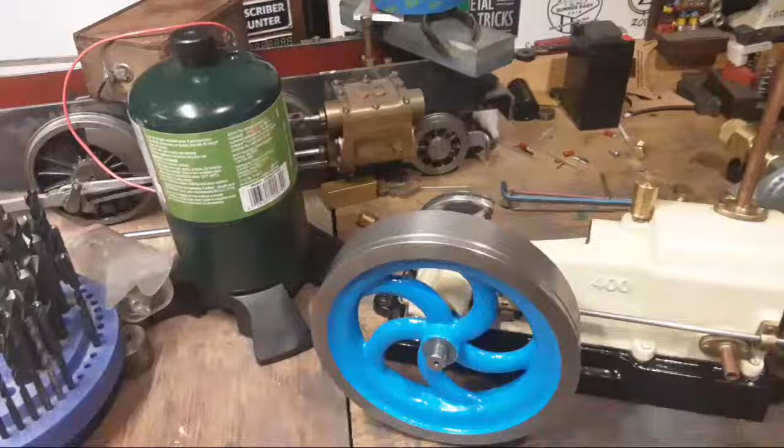Am I late? What did I miss?

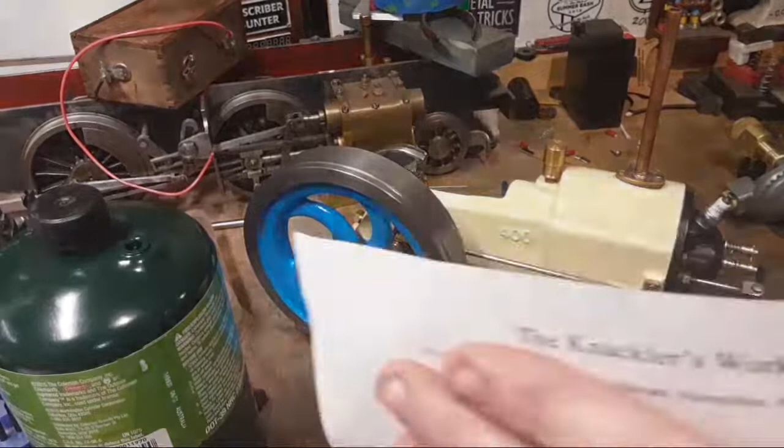So sometimes the post service can work. But I got a letter from Knackler's Workshop, if you want to see his address, but that's really nice, Paul, nice letter, and a couple of stickers. I haven't put them on the board yet, but go and check him out, there's some stickers there.

Rustnox, no, I didn't receive your stickers. Sorry, hasn't turned up. Mail's all over the show, so I'm not despairing about anything at the moment except the two taps for the head on here, and some wiring from Western Australia that needs to be here. What else? There's some pipe fittings for the muffler which I haven't seen yet either. At this point, I don't have a lot of stress about the mail system because it's crap. It's really bad. Oh, and a bit of bronze for another project, but we'll get onto that in a minute.

Project update. This is back together, right?

Hey Cam, good to see ya. Great video on your trolley the other day. Interested to see the crane when you build it. It's pretty cool, Cam. Good to see an update from you.

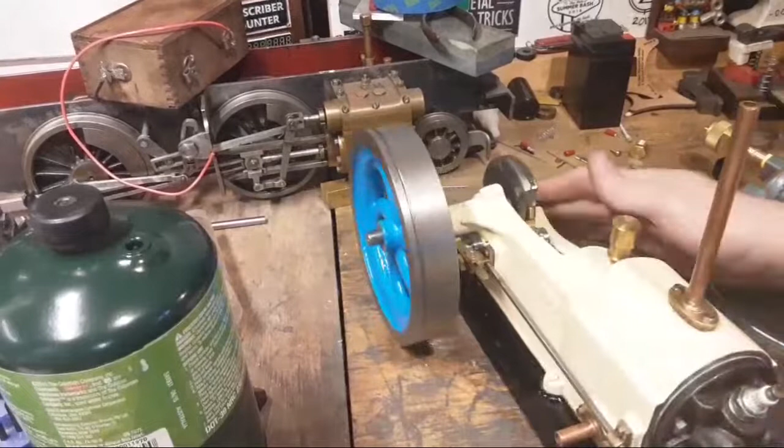But apart from that, we've got it making all the right noises, which I really like. This is all.

I don't know if it's got enough compression there or not. Certainly got some blowback there at the moment. Give it a couple of spins and it fixes it, but I don't know whether that's a good thing or not. We might have to think about fitting another set of rings if it hasn't got enough. A touch with the oil can will probably make a huge difference. But I don't know if that's enough, really.

Let's try this. Yeah, see, that's probably got enough there to run. I don't know, I really don't know. No real point of reference on that.

Wazza says it will run great. We'll see. I don't know if it's got enough compression. If you turn it over slow, it turns over pretty easy. If you give it a bit more, it's certainly got enough to pull you up. But at that speed, it hasn't got a lot.

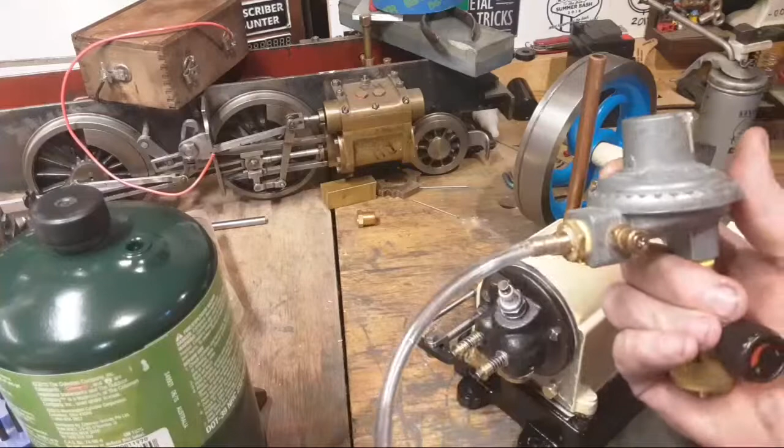Got a regulator which should work on that propane bottle over there, with a needle valve. This is 2.75 kPa, which is - do the maths - I think less than 0.4 psi. There's another tap on here to limit it, so hopefully that should provide the right sort of gas to get it running, from what I've heard. If we close this port, you can hear that valve pop as well. So that's working.

Probably more than a few thousands, I don't know.

This needs bolting down on a base of some sort so it doesn't run all over the place, because it's pretty top heavy, to be honest. If you've heard videos of it turning over, most of the noise is because this base is running - that's where the knock is. So it needs a decent base made for it.

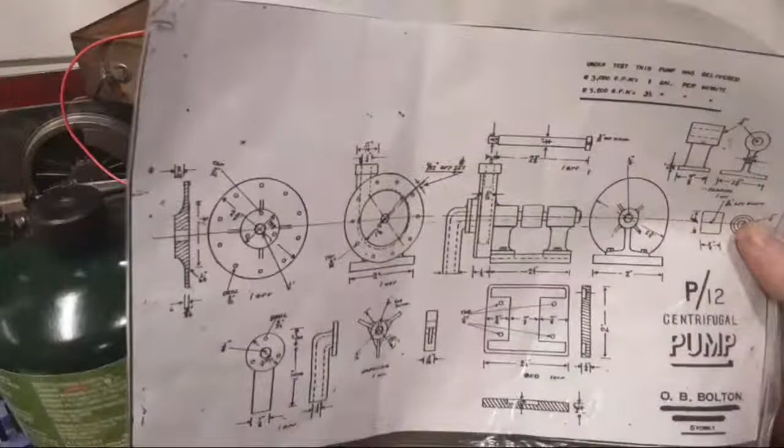I'm going to show these drawings - you can't read anything on them anyway, I can't read anything on them from here - but this is the drawing for the P12 OB Bolton pump, which is sort of the same time period.

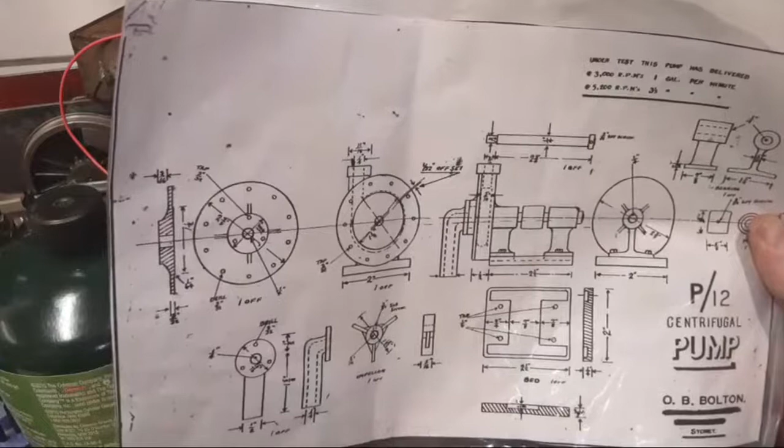And this is what we're probably going to build. It's fairly basic, almost toy-like. There's no gland here on the bearing, so they've all got to be a pretty reasonable fit. Whether I put a seal on there, I don't know - I think that might be overkill. We could probably do it without too many issues to stop the water leaking out.

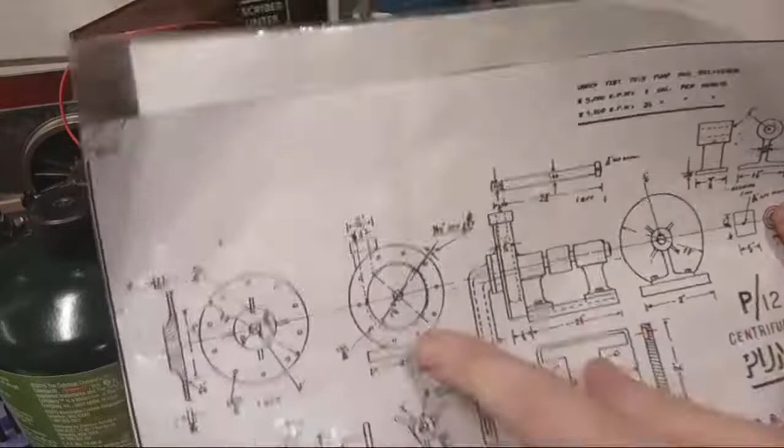It's got an offset bore in here and a 3-blade impeller that's pretty basic and doesn't really show the entire workings, because as drawn it probably wouldn't work. But it's not that difficult to get to work. It's 2 3/8 inch diameter, and this base is 2.5 by 2 inches.

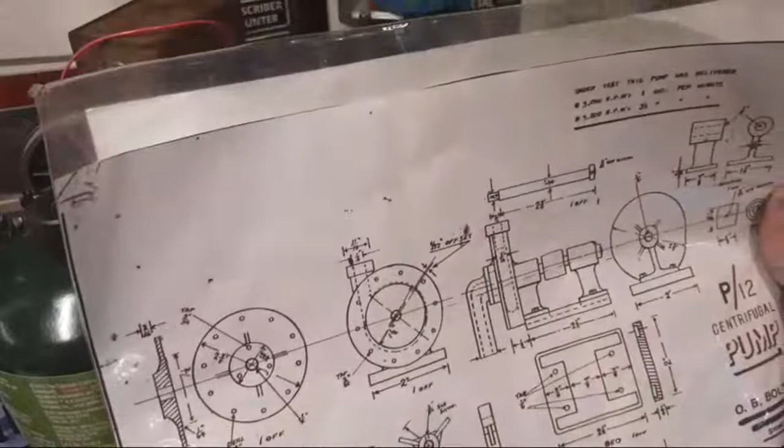I modelled this up on CAD. If my 3D printer situation's fixed by the time I get to it, I'm probably going to 3D print this and see how it looks, see if everything lines up before I start work on it. But otherwise, I'm probably just going to make one. So that's a little pump.

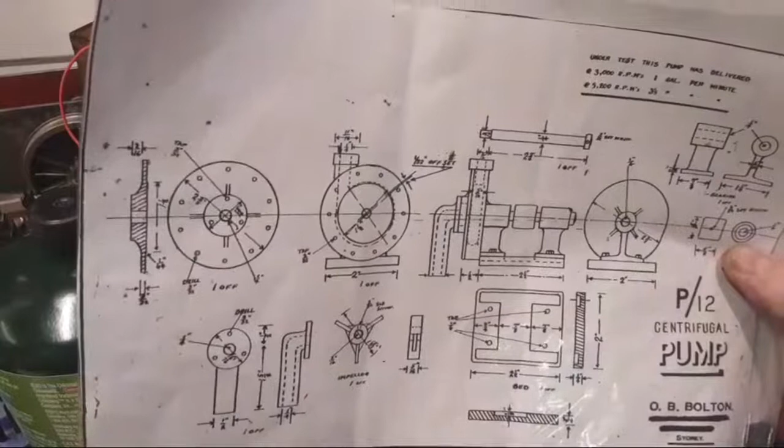The castings are available if anyone asks, and I know they all do, but they're fairly expensive because a couple of them have got some fancy cores that are a bit tricky. So probably going to fabricate this, I think.

Cork gasket on here. Someone asked the question - it's 0.8mm cork, cut to size and shape and screwed down nice and tight. This is Teflon or PTFE. I really like this because I can take it off and put it on as many times as I like, and it still seals just really easy. So I really like that. Hopefully it's heat resistant enough for this engine, but I don't believe it's going to get that hot. If it melts, we're probably doing something wrong. So there we go.

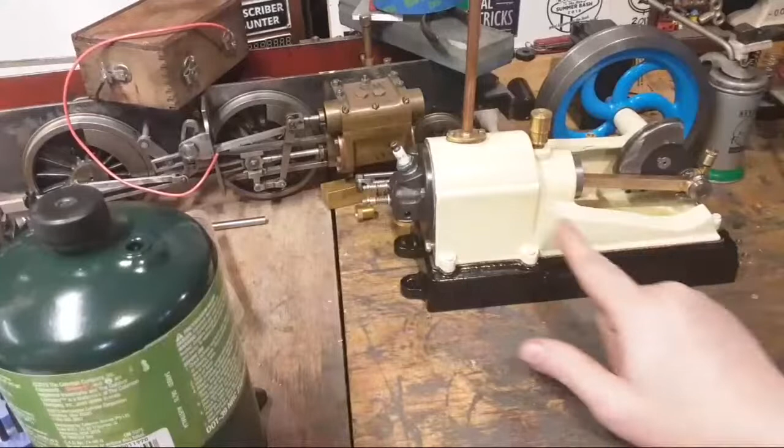By the weekend I might be ready to have another play with it, but at this point I'm thinking it needs... I'm black now because of it - it's always the way, I have to find a rag for that. I'm thinking it needs a blue stripe on here, probably just one on here it'll get, and probably a square around the top and a stripe this way, something like that.

It would be fairly basic and probably only on the front. Whether it has one down there or whether I put one around the top there, I don't know. I think that's a bit overdone. I think we're just going to run a stripe across there - probably a stripe around the top and probably a blue stripe here. We'll see.

Really impractical paint colour, just so you know, but too late now.

Picked this up this week. Been looking for a while for a small scribing block. This is obviously shop made. It's pretty clever design actually, really quite smart. It's adjustable.

The only problem with it, might need some mods, is that it's only adjustable when this is loose. So we're looking into that. It's quite a well-made thing.

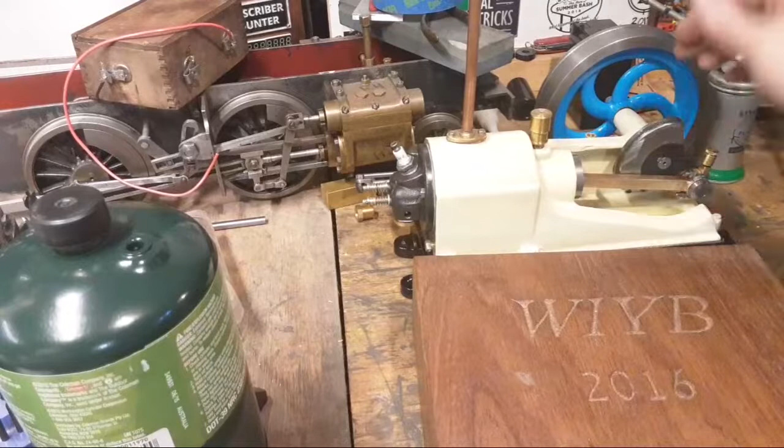I put in a pretty scary video because you've got to be in things to win them, and I actually won. So it was pretty amazing, actually. Still got a certificate up on the wall that says I'm voted worthy, which is from Keith Fenner, which is really, really nice. But someone made these, and I was lucky enough to get it.

Until now, I haven't been able to use it.

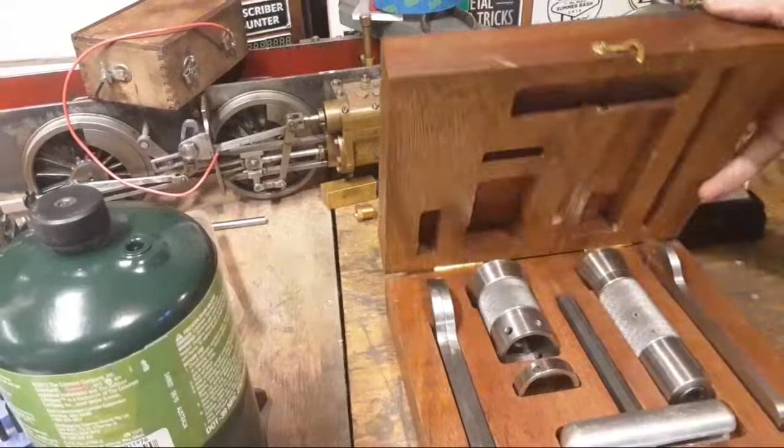Let's have a look here, though. Put that, rest that against. Yeah, it's resting against that pipe. This is a collet holder for 5C and R8 collets.

I haven't had it out yet because I haven't had a big mill, but this is a beautiful machine, a beautiful tool. So that goes in there. It's got a locking ring and a couple of C spanners to, basically it's a holder for a 5C collet for doing handwork. And pretty cool design.

And I've used it 2 or 3 times since I've had 5C collets, which come with my grinder.

Gosh, the competition was strong. I must have actually, JB, I must have actually done something right. I don't know how that happened. But I really wasn't on the cards to win at all.

But this is one of the very cool shop-made tools that was sent across. And I don't know who made this at this late stage. I imagine that I sent him an email when I got it to say thank you. And this is the first time 4 years later, nearly 5 years later, that I'm actually using it.

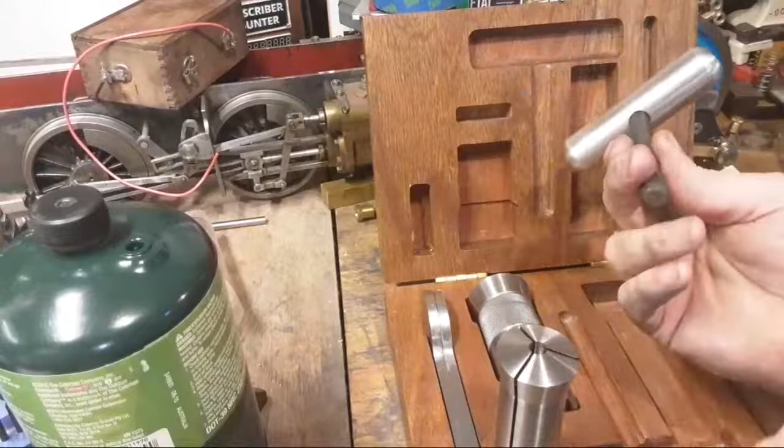Pretty awesome thing. I just, for the past couple of weeks, thought I ought to get that out and show people because I do use it occasionally. And someone might be interested in that if you're looking for a project idea.

That's a pretty cool design, really. It's got a proper stud in there, or a pin in there to stop the collet turning.

And 2 C spanners to do it up tight. If you're doing freehand work, pretty useful thing.

Anyway, with that, everyone's gone silent.

The other exciting thing about it is that it doesn't always close. Let's touch on that. Touching here somewhere, one of these ends. We'll have a look.